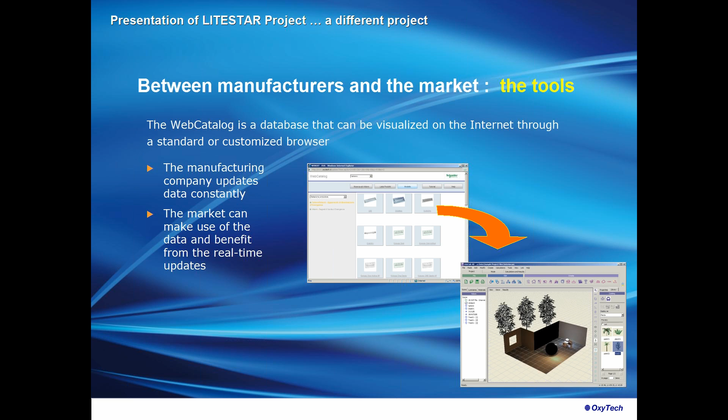But what are the main features of the OXL file? First of all, it's a file based on the XML technology.

The XML technology was developed at the time of the Internet, when Netscape was competing against Microsoft Explorer. At that time, it was very difficult because with any new version there was a new standard, so you had to remove the previous program and install the new one.

A commission was created at that time, and they developed the XML file system, which is capable of adding new parameters whenever needed. So at the end, it has extreme flexibility and expandability.

This means that whenever we need to add new parameters, we can add them without having to start from the beginning. This is absolutely not possible for the structure of the LDT and IES files, for example.

The OXL file includes all product data: datasheet, photometries, images, text, additional documents, all packed in the same file. So when you transfer one file, you can transfer the full set of information to the market.

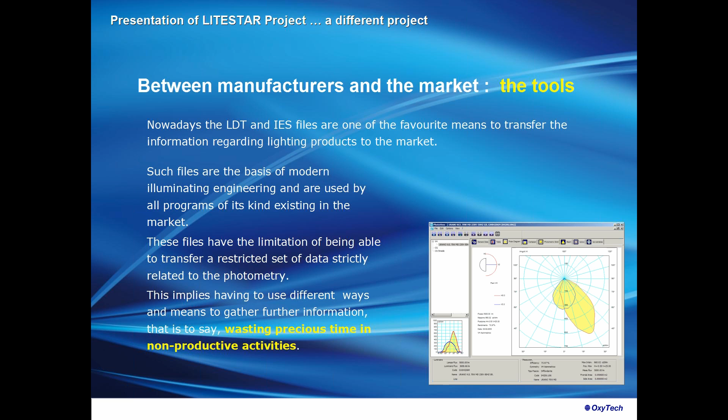So, the LITESTAR project wants, therefore, to be the driving force able to encompass all these different needs, respecting the personality of all the realities involved. This is our main goal.

Let's have now a brief demonstration of the different features, allowing us to show you the flexibility of our system.

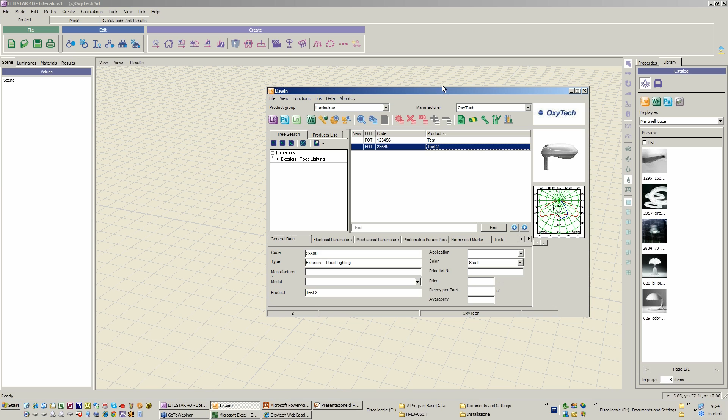So, let's show how easy it is for a market reality to update data using a web catalog supplied by a manufacturer. From the program, we select a manufacturer of interest. From their local catalog, we select the WG, which is a manufacturer's web catalog.

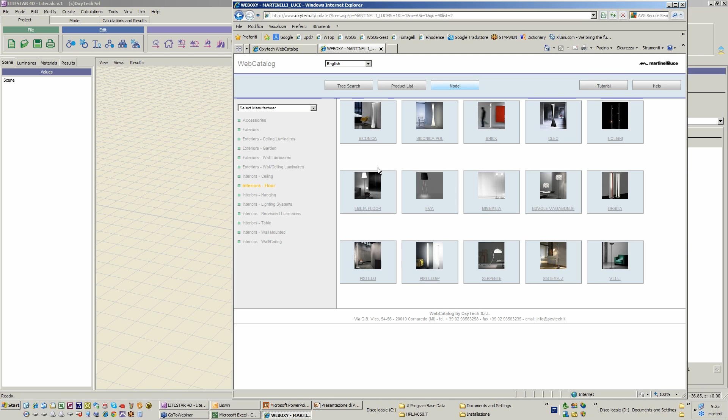We jump into the web catalog of interest. We select through different features. We select, for example, the product. We may select — no, I want to change table. We select, for example, this one.

Through here, we can see the photometry, we can see the different images, and once I've found the product, I simply drag and drop the information from here to here.

So, this is what we said: the manufacturer has the capability of inputting data into the database.

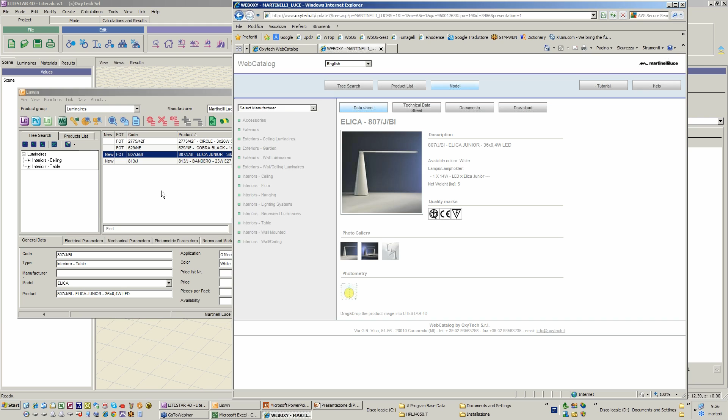They upload the information to the internet, and once it's ready, the reality in the market can download the product easily, simply doing a drag and drop from here to the local database. And the product now is available.

Once it is here, it has the photometry, and we can start analyzing the product from different points of view. So if you want to analyze the photometry, we simply select the luminaire and press PV.

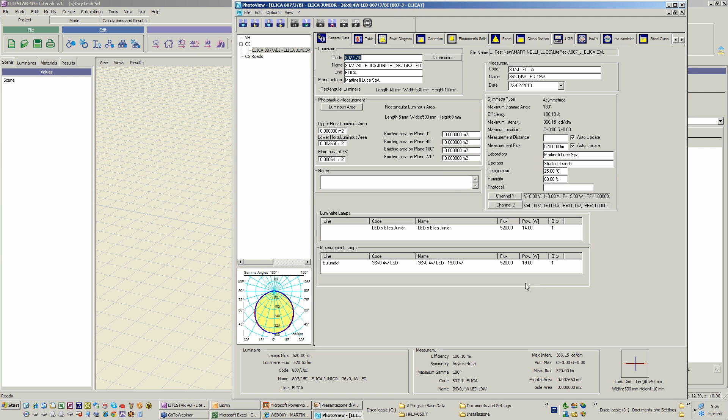And from PV, we have access to the photometric data manager, where we can analyze the photometry from different points of view.

Or from here, it is also possible to visualize a data sheet. I'd like to tell you that up to now, I didn't even touch the keyboard — all was done simply using my mouse.

I can select the images, I can select this one, I remove this one, and add this one. So as you can see, very flexible.

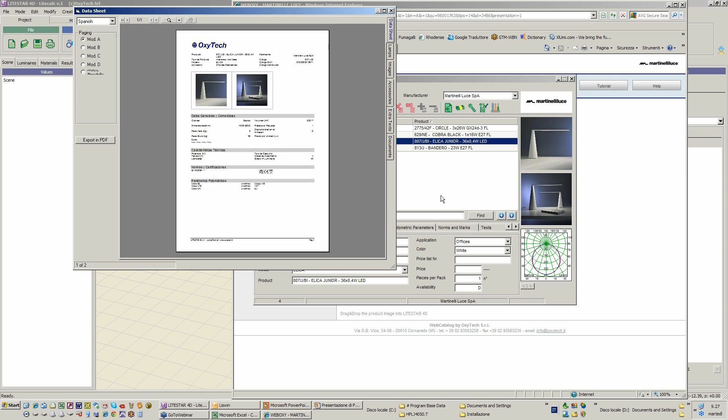But also from here, it is possible to right-click, select 'product list', and add this product to the product list. From here, I can simply access the program to manage specs and offers.

So I say this is spec number one. I save it as number one. And then I create a...

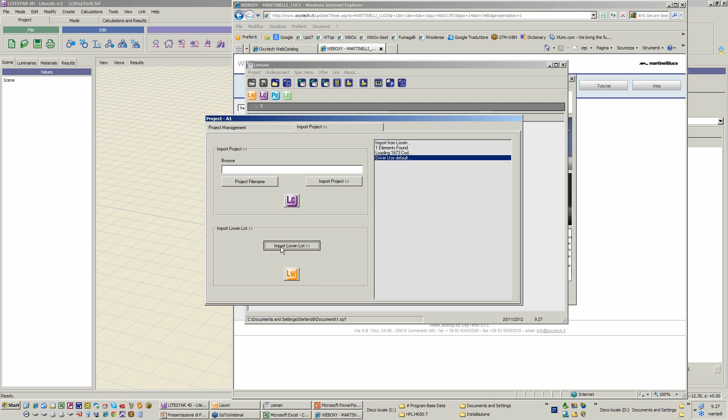...sub-project, so I call it A1. And from here, I import my product — you remember this product was carried directly from the internet — and from here I can visualize the final document.

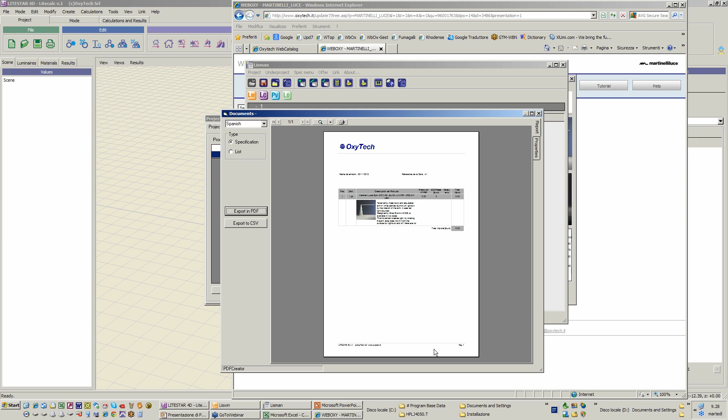I'd like to say that from here it is possible to export, and here we can also add customization, so it is possible to export this into different formats, including Excel.

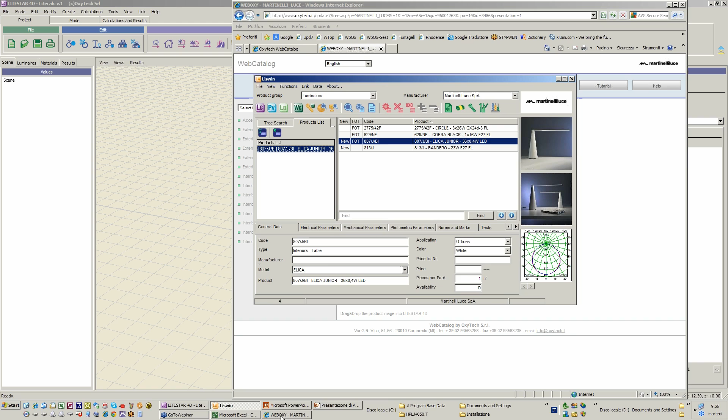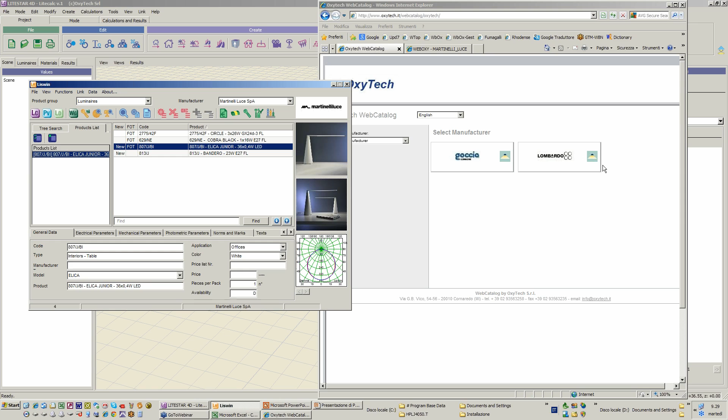Let's come now to the web catalog, for example, for the manufacturers, distributors and retailers. This is an example of a typical web catalog at a distributor. They can show the different products of interest, and from here the customer, the installer, or the designer working with that distributor or wholesaler can select the product. This is a limited set of information, because it's not the full set of information supplied by the manufacturer.

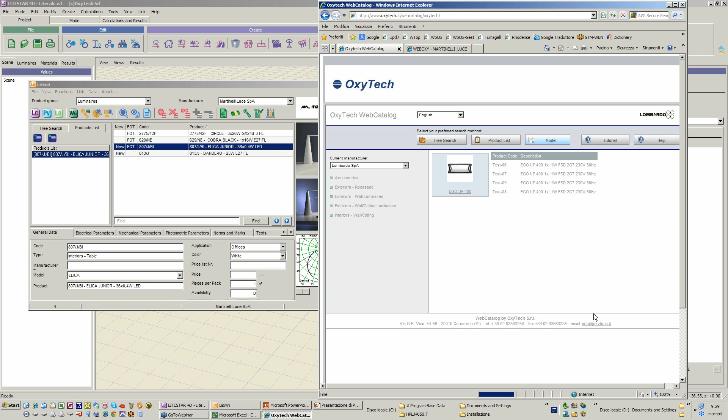From here, the reality in the market can select the product and at the same time import it into the local database. We want to say that our system is already capable of managing e-commerce. In this case, you simply have a request to send to the manufacturer or distributor, or it's also possible to have e-commerce here.

So as we said, the web catalog for distributors is a web catalog where we have different manufacturers, where it is possible to select the products, but where the products are filtered according to the wholesaler's needs.

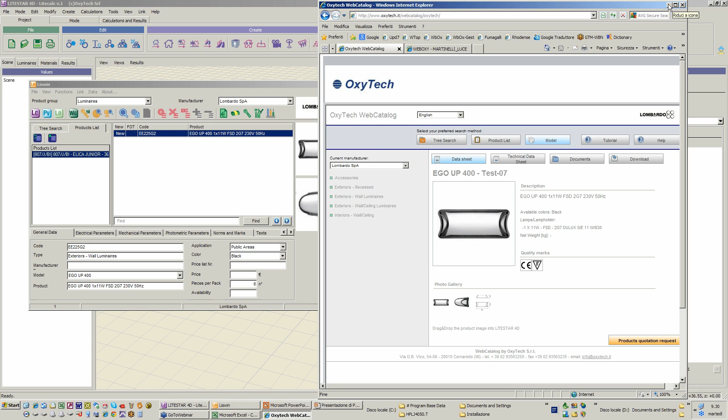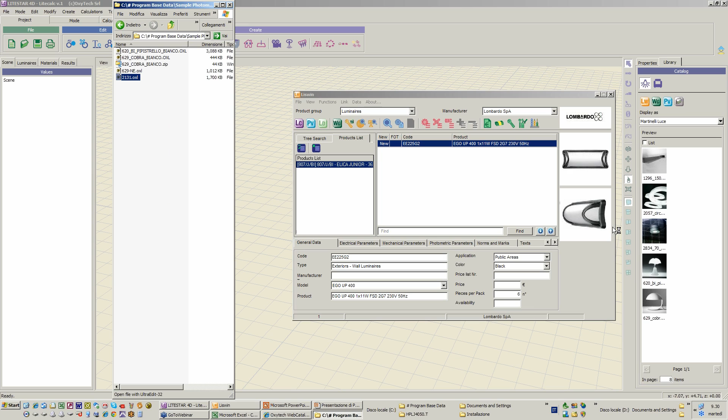Let's have a brief view of the OXL. As we said, the OXL carries the full set of information related to a product. For example, if we access a folder, we can edit the information related to this product and visualize the structure of the OXL file. As you can see, it is something completely different from an EULUMDAT or an IES file, and it carries a huge amount of information.

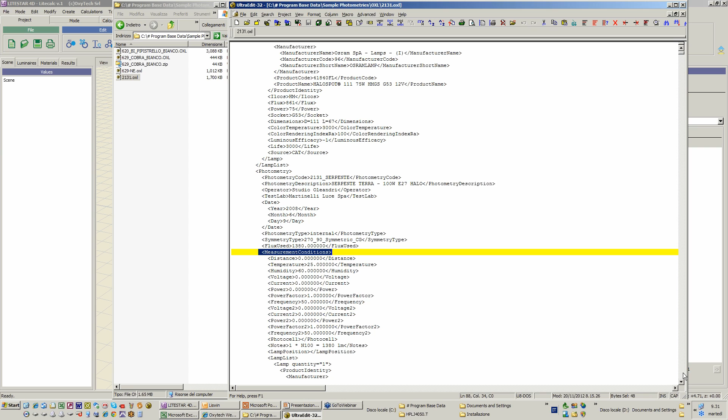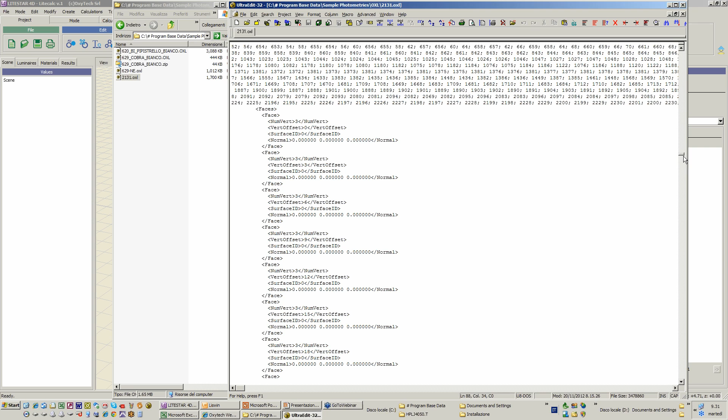As you can see here, there's information related to the manufacturer, the luminous area, the luminaire, the lamp, and the measurement conditions, the photometry, and from here the information related to the 3D of the luminaire, the images, the descriptions in 23 languages, and at the end we have the PDF files.

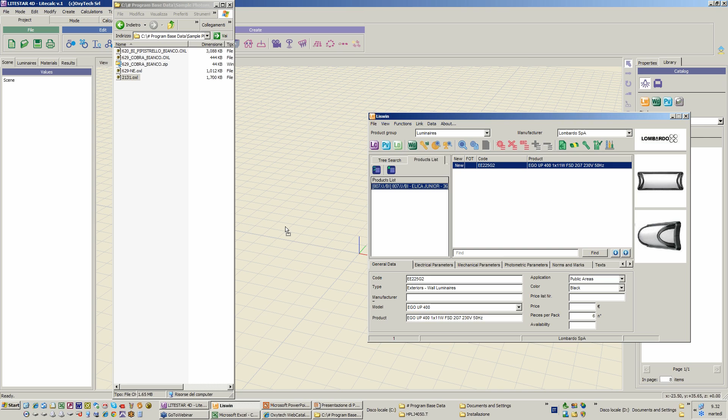Again here we have an image, so everything is packed into the same file. But what does it mean? It means that if I want to use this file directly in my design, it's not necessary to import it into the database - I can simply select it from the folder and add it to the working plane to run my design.

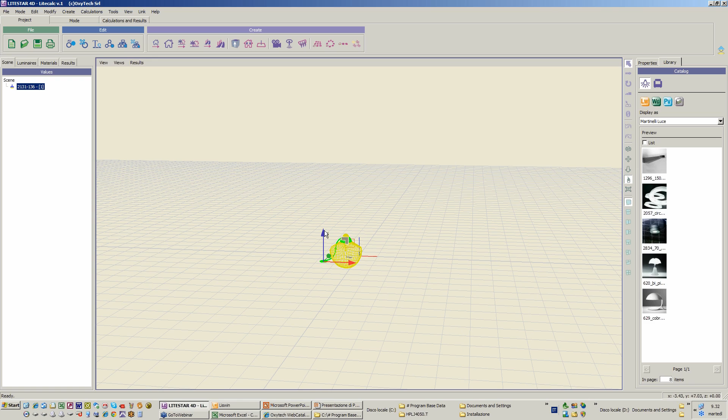So here I have a product with a 3D model. I can put it exactly at the proper location and visualize the photometry - as you can see, we have the 3D and photometry all together. But we can also say that doing it this way, we have the information now available in the local catalog too - it's simply necessary to drag and drop this information in here.

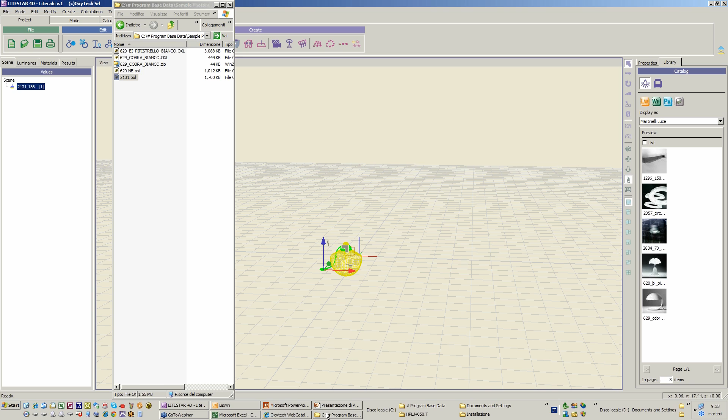Let's see now how it's possible to manage EULUMDAT and IES files in a very simple way. For example, if we have some EULUMDAT files, it's possible for a market reality receiving information from the manufacturer to simply do it this way.

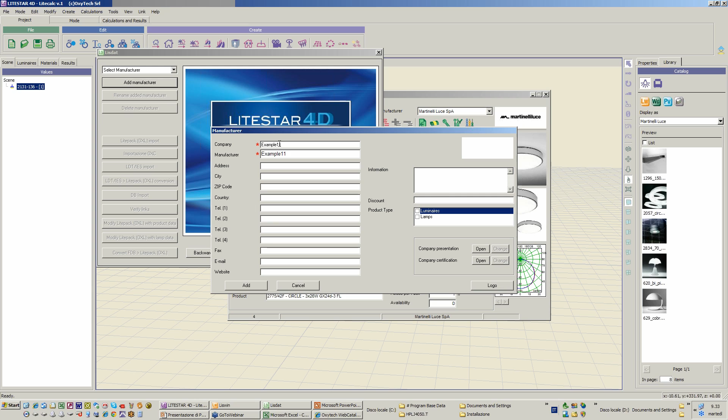I create my own folder and call it example 11. At this stage I select example 11, then select import of LDT and IES files. I search the folder where I have my files, select three LDT files, and open. The files are converted automatically from LDT into the OXL format. Once they were imported, I close my window and select example 11 from here.

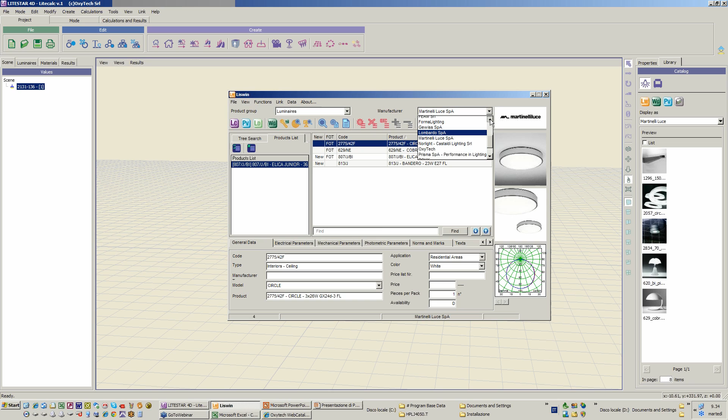I have my three files, my three products, and from here I can also do something more - for example, I can add an image to the product. So I select media and access the section where I can add an image to the datasheet.

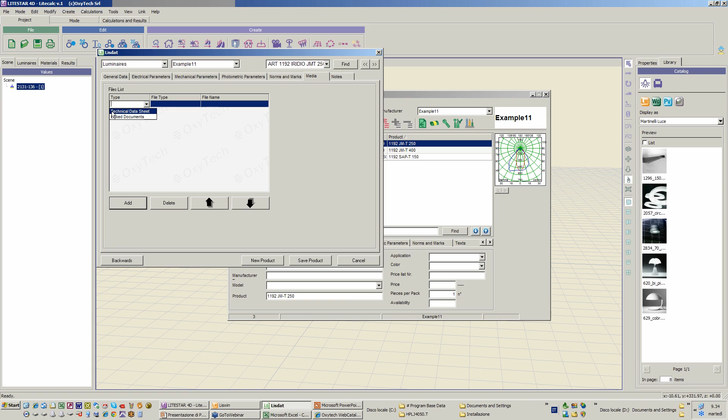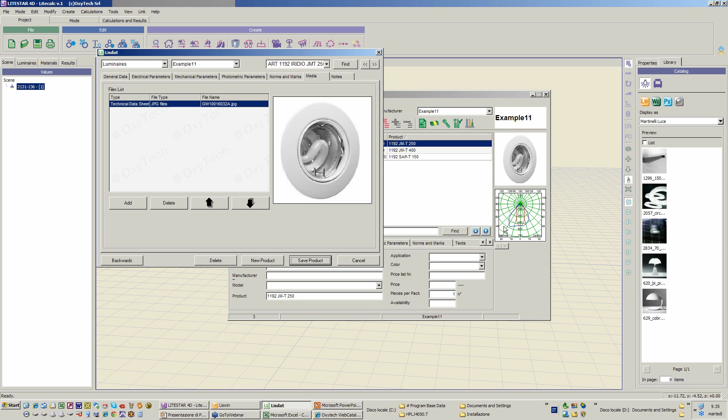So if I select OxyTech, I select this luminaire - this is my luminaire - and I save the product. The image will be immediately added to my product, and immediately I can have my own datasheet in different formats.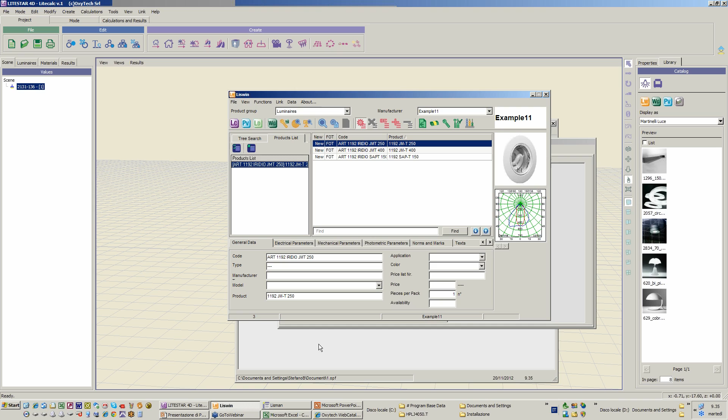So from here, whenever I access the same offer or spec as before, I can add this product to my list. I remove this one because it was already imported, then add the other to the list, access it here, and do the import. Another product was added with the image.

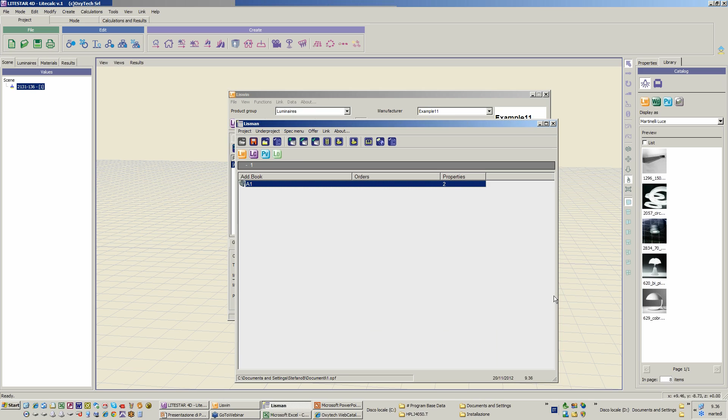And now I come to the spec, or the list of the products - as you can see, done in a very simple way. The keyboard, I repeat, was touched - no, it was never touched.

I hope to have shown you my idea about the flexibility and the goal that OxyTech has in order to propose a very flexible, expandable, and powerful program to manage all the different needs of manufacturers and market realities.